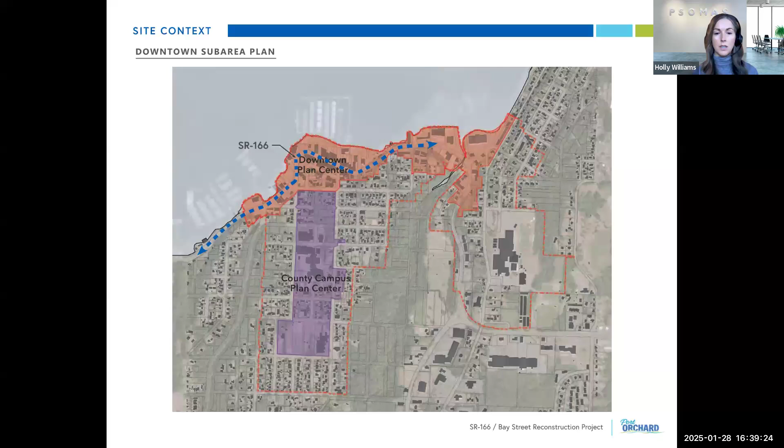The SR 166 improvements will then set the quality for future improvements and essentially create new streetscape standards for downtown.

Next slide, we're zooming in now on the west downtown planning area, looking at the redevelopment concept plan in the sub-area plan. They identified this area as a cultural, civic, and recreational hub within the community. So what we're looking at is a planning level concept for that vision, and we're carrying it through in all these various projects.

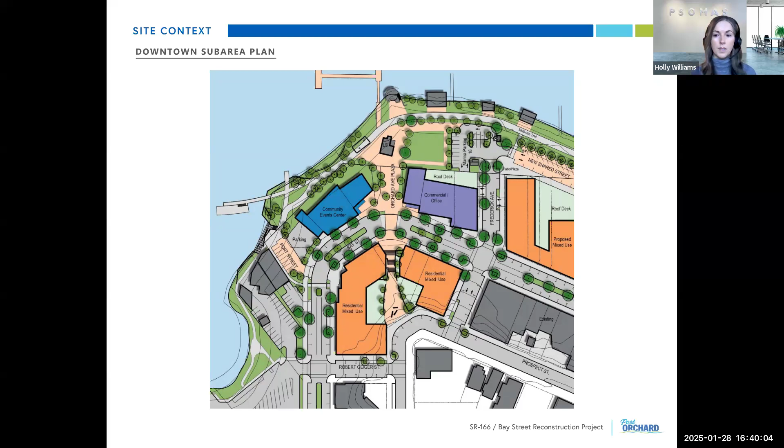Next slide. So with that, we'll look at these downtown projects quickly. One of the challenges to this project is piecing all of the different projects and puzzle pieces together. One of the biggest implementation challenges, and a driving goal for these projects, is to raise the improvements up in elevation to deal with flooding and rising sea levels.

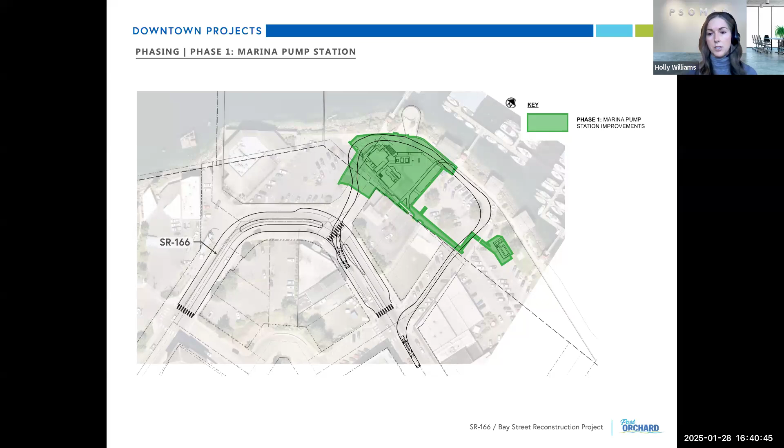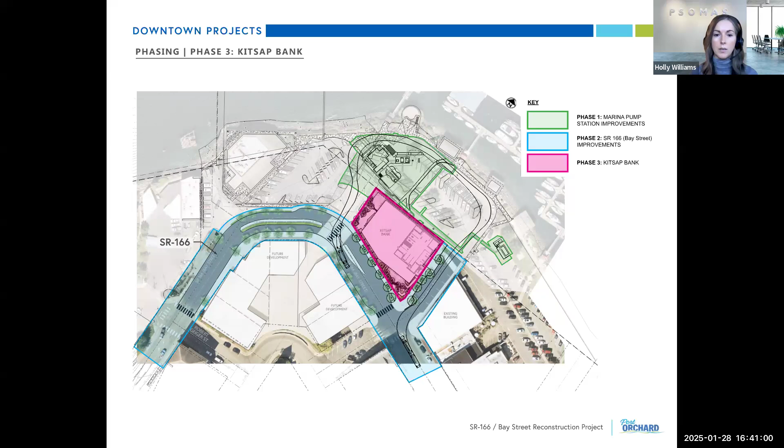So we're just going to step through quickly the phases for these different projects. This one is the lift station that's under construction now. Next would be our project that we're talking about today, the SR 166 improvements, in blue. Then next we have the relocation of the bank, in pink, the CEC and the shoreline improvements, in orange.

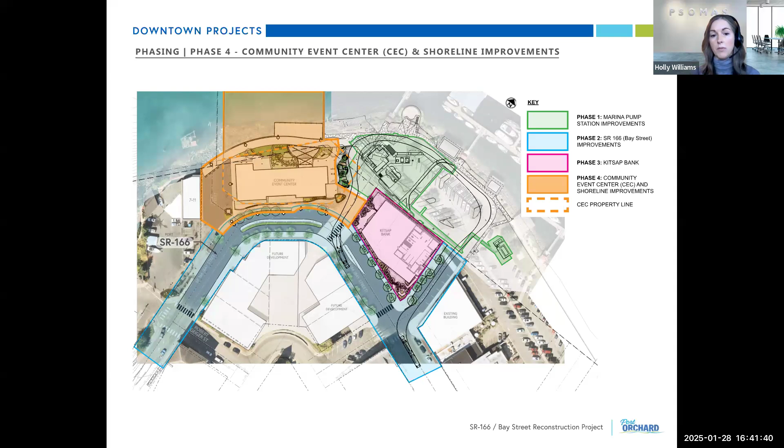So it's important to note that there's overlap within the blue areas for the extent of SR 166 with the frontage improvements on the CEC and the bank frontage improvements. We're going to show you how we're trying to tackle the interim conditions for the streetscape, back of curb for SR 166, and then planning for these future improvements with the CEC and the bank to come in for final conditions. And then the next, in yellow, will be the plaza. We're assuming that'll be the next phase to come in.

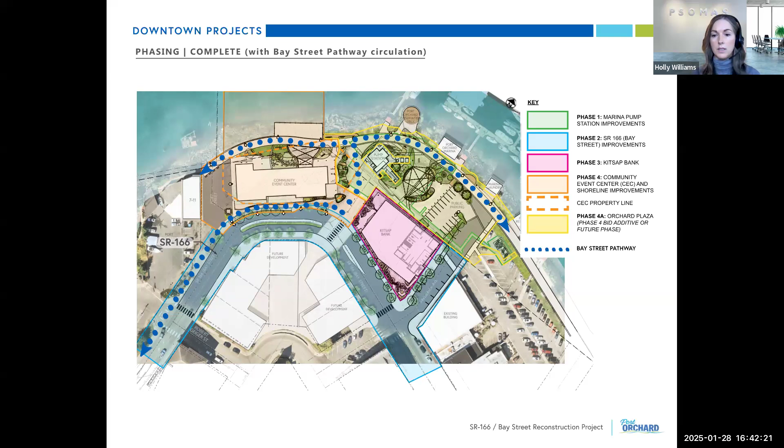And then next, the layer of the Bay Street pathway, the multi-use path. This reflects the recent study, the preferred alignment for that pathway route, which is really key to this project, as it's imperative that we implement that first segment of the pathway within these SR 166 improvements.

With that, Jake is going to step through the overall vision of the look and feel for all of these projects, and then we'll step through them briefly before getting into the design elements specifically for SR 166. Please feel free to jump in and stop us if you have any questions.

Heidi asked about the walkway, where the community center will be, or the bank is now, with the office where the marina is, asking if that walkway will pretty much stay the same, maybe with just a little more cosmetic work. On the shoreline, where Jake's pointing, it's still going to be pretty much the same, but fixed up a little more. That's part of the design improvements for the plaza, the zone in yellow that was pointed out, looking at how to integrate the new, wider promenade that the multi-use pathway will go through. But on the back side, it'll be minimal impact as much as possible to the properties outside that area. Heidi confirmed she was asking about the pathway on the waterfront, and thanked them.

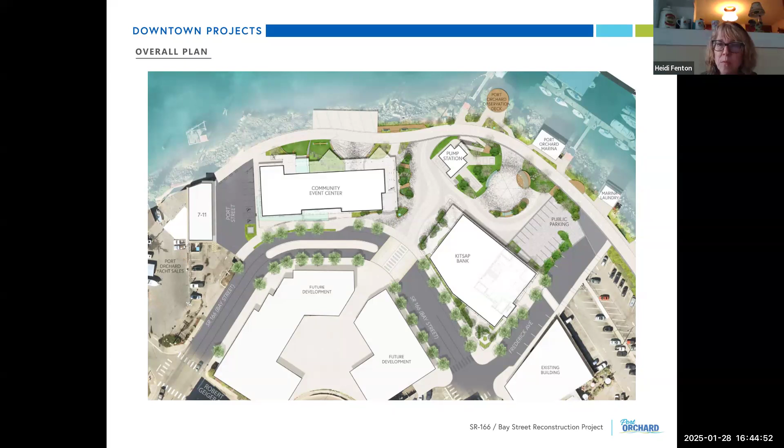Like Holly said, if you have any questions as I'm going through this, feel free to jump in.

Here we're looking at just the overall look and feel for the downtown waterfront area. Early on, a big goal for the project was to create a really inviting and active community space that can function when there's large scale events, but also on a daily basis if someone wants to come out and eat lunch or read a book from the library.

So with that, pulling from the nearby shoreline and nature that's all around, using organic forms throughout all of these different projects, and really making it a special place, each having unique spaces between the CEC, Kitsap Bank, and Orchard Plaza, but also having unifying elements that carry throughout.

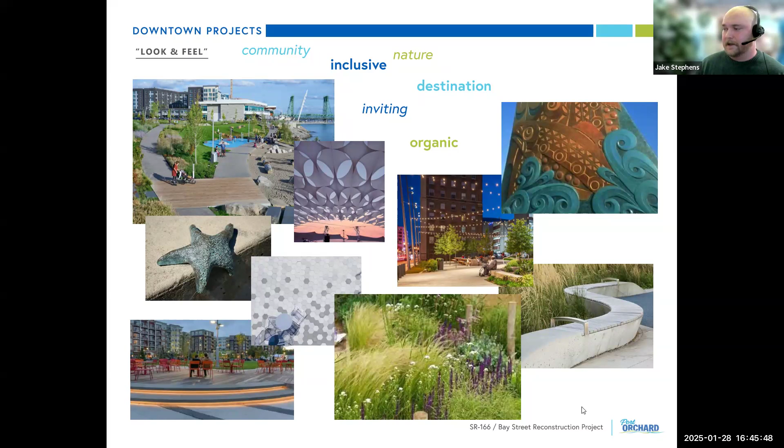So first looking here at the Community Event Center, we have the overwater deck and kind of open plaza space for larger scale events, overhead catenary lighting, and a special paving plaza treatment. And then you can see the multi-use pathway along the backside, with a different paving treatment and scoring that delineates the space, identifying it as a pedestrian promenade, like Holly was saying. We're also bringing in natural materials like wood, and a planting palette that has variety, but also low maintenance, giving that coastal vibe, look and feel.

And then also on the front side here, as Holly said, this is an earlier concept, so it's still in flux as we move forward with the CEC and SR 166 design, but showing final conditions of a scored sidewalk, street trees to create overhead canopy, which also supports a bit of traffic calming.

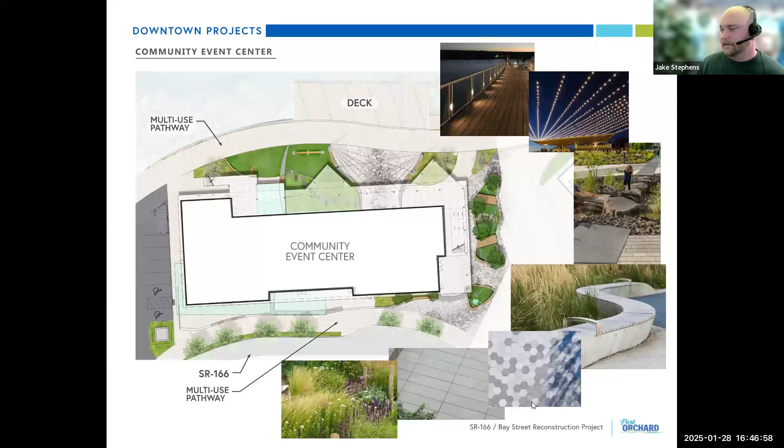Moving on to Orchard Plaza. Again, that multi-use pathway runs through like a spine of sorts along the waterfront, carrying that similar materiality and language, and it will cut through the plaza. Here using a different kind of treatment - as we work through design, we're trying to figure out ways to signal that this is still part of the pathway, but also a plaza open space, so mixed use, signaling bikers to slow down throughout here.

Also in the plaza is the lighting that will also be on SR 166. You can see that here as pedestrian scale lighting, and then other plaza lighting just to illuminate the space and create a safe, welcoming environment.

And Jake, if I can add to that - the lighting you pointed out on the top left, that's what we have planned for a version of that for the pathway when those projects, the CEC and this plaza pathway, are integrated. And you'll see that we're proposing that for the streetscape for SR 166 too, so just wanted to point out that cohesion we're trying to achieve with these elements.

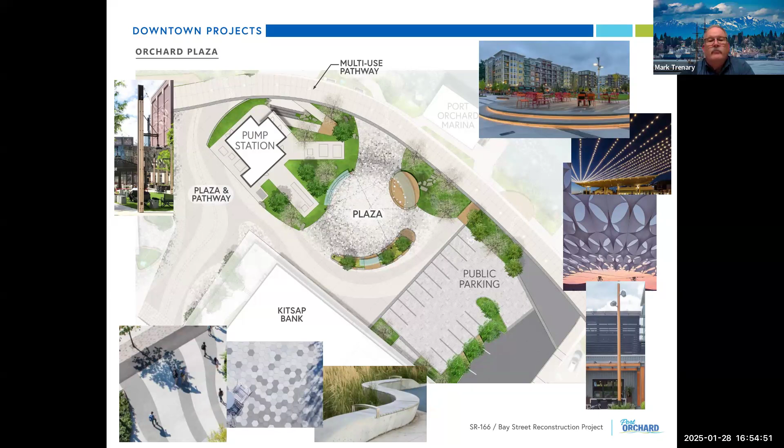Okay, thank you. Yeah, you're welcome. So we should probably scoot on to the next. Yeah, thanks, Jake. Yeah, moving along.

This image here showing final conditions of that, like we said, the early conceptual illustrative graphic, with street trees to create that canopy, roadway planters, and scoring. This is just to give a snapshot of what we had been thinking in the past.

On this next slide, I'll show you where we're at currently for the 60% submittal that John was talking about, showing the raised crossing at Orchard Plaza along with 2 center medians along the roadway, supporting traffic calming and making it more accessible and easy for pedestrians to cross the street and feel safe doing so.

On this backside, interim asphalt conditions until the CEC goes in. So with this phase, getting in essential infrastructure, illumination, matching grades where needed. Then on other portions, installing the concrete trail that was on the other portions that we had looked at for the CEC and along the waterfront, continuing that language and scoring so that it picks up again, indicating that it's a pedestrian trail space or pathway.

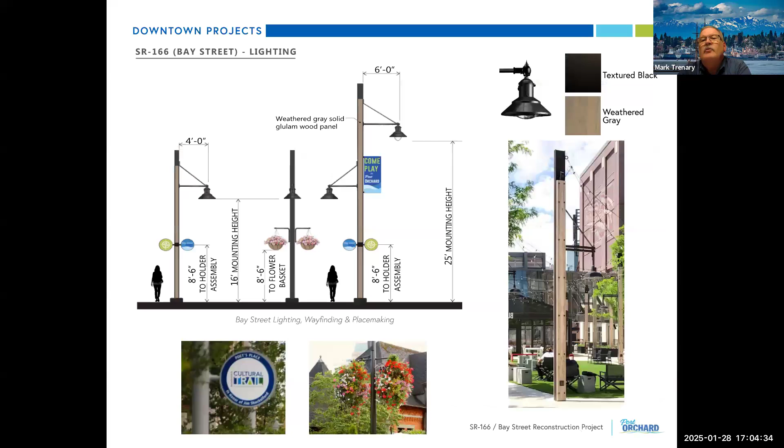Any more questions at this point? Yeah, I've got a question for John. Can you remind me or us where the 20-mile zone will begin, coming heading eastbound, coming west? Where Port Orchard Boulevard is, in relation to this new section of project, where will it drop down to the 20 zone?

We had met with WSDOT and their Olympic Region traffic engineer and came to a planning level agreement. The right place is the intersection of Kitsap and SR 166, at the turn into Water Street. The exact signage location hasn't been determined yet. We have a plan that we put together and sent to WSDOT with a detailed location for them to review - that's part of our 60% plan. We haven't sent it yet, but verbally we talked about it in our coordination meeting and agreed that was the right place to put it.

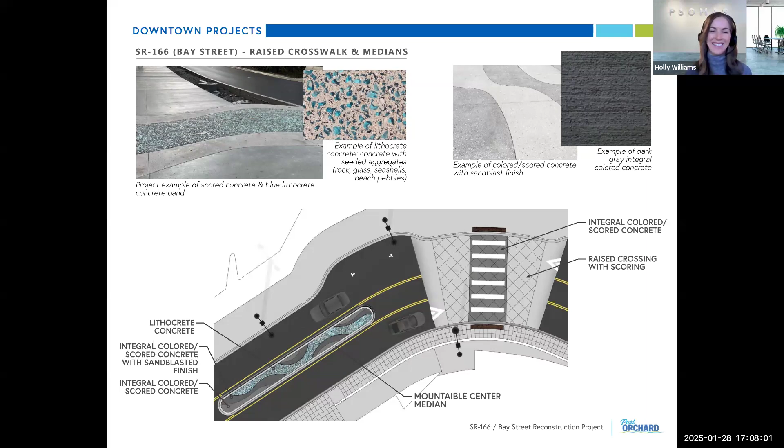I'll wrap up with a quick overview of the landscaping. We're using similar plants as proposed in the CEC planter areas and Orchard Plaza, but here along Bay Street using a more minimal, low maintenance palette that still has seasonal impact - some evergreens, but also deciduous shrubs with seasonal flowering, and some ornamental grasses.

This will be a future phase with the CEC, installing more street trees along that frontage. These are smaller street trees which will help frame the CEC without blocking too much of the architecture or views out to the waterfront.

Because the pathway goes along the CEC and SR 166, the planter space is a bit limited, so we're making sure to put in trees that can be happy within that space. The palette focuses on water-wise plants that'll do well through the summer with minimal maintenance.

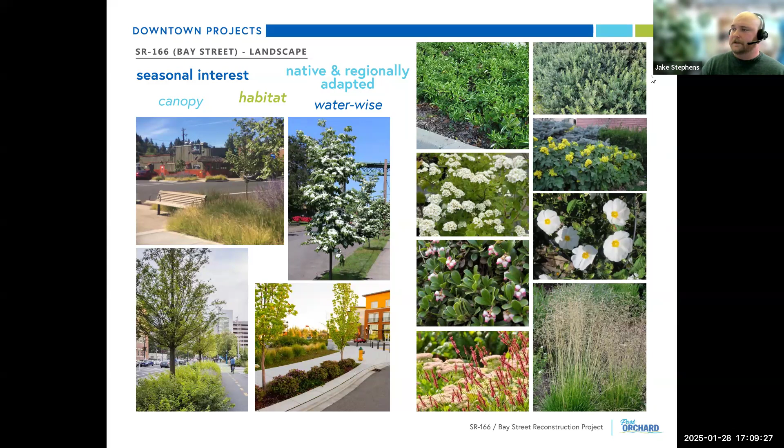Our last slide covers the parameters of this first phase of SR 166 improvements - the interim conditions and the tight space Jake mentioned with trying to fit in the multi-use trail and the frontage improvements at CEC. We don't have a lot of room for typical downtown streetscape amenities such as benches.

Gateway signage, that sort of thing. But we're thinking long term, and with opportunities within the frontages of the CEC and the plaza, we're looking to incorporate public art, seating, signage, and that sort of thing. So with this first phase of SR 166 you won't see a lot of that except for the details Jake shared, but it's good to think long term for these downtown improvements.

And with that, any additional comments or questions?

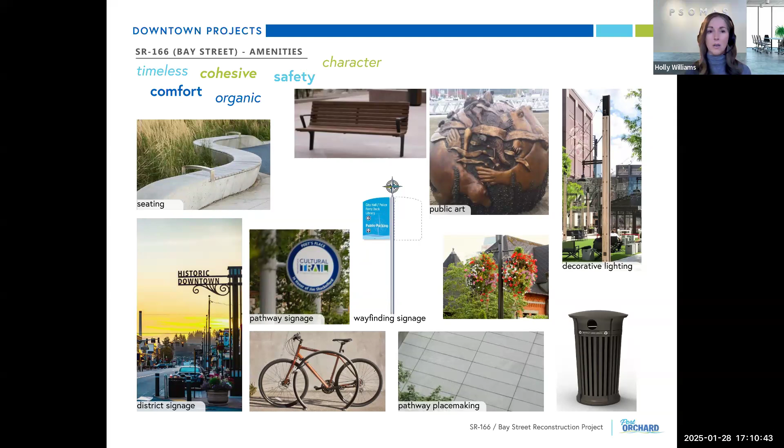Is that the only place where that blue walkway, the wave, is - or will it be implemented throughout the area? There's two medians, Jake's pointing at the bottom in the yellow. So it's a median, not a walkway - something you'll see as you drive by. And to the right of that median you have the raised crossing.

Jake, did you say that colored, wavy thing you guys are talking about is drivable? Yeah, it's drivable, it's just seeded concrete, all set in there. Is it raised like 6 inches or something, just curious?

John, do you know? I think the curb itself is a washed-out style mountable median curb, but the height differential is about 6 inches. It'll be exactly like the Bethel 166 roundabout that just went in by Kentucky Fried Chicken, so it'll be drivable like that. That's the standard.

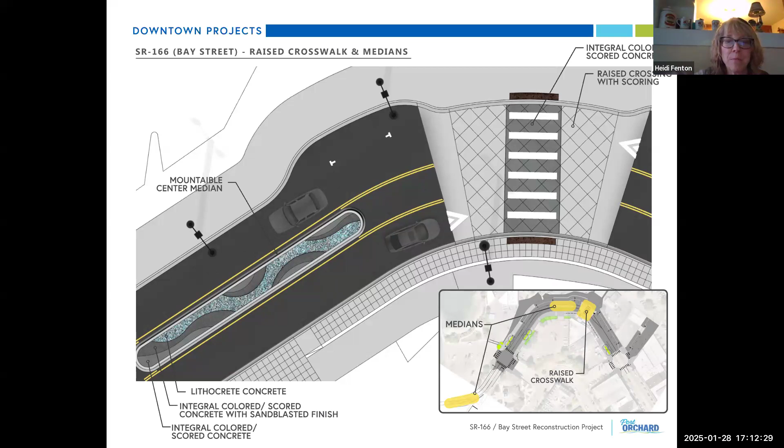This is much prettier. The color appearance is going to look a lot different though. The functionality and safety is up to state standards, but the visual stuff is going to look pretty nice and different. Maybe we could put it on the side, over by the walkway, on the side of the community center, so we could put more of that in.

Yeah, that's definitely something Holly and I will be looking at. The community event center and plaza have been put down for a bit to focus on SR 166 to get that up to speed, but I think it would be cool to have some pops of that throughout maybe the plaza or somewhere along the waterfront.

Yeah, is it very expensive? It is pricier for sure than standard, so that's why in the median we're keeping it to a limited area, but we've used it in the past as a little band or sort of medallion. So there's ways to use it strategically that creates a nice impact. Yeah, beautify the downtown.

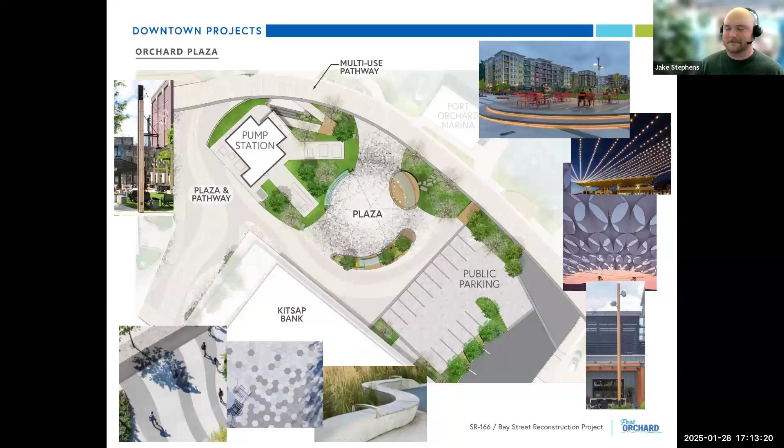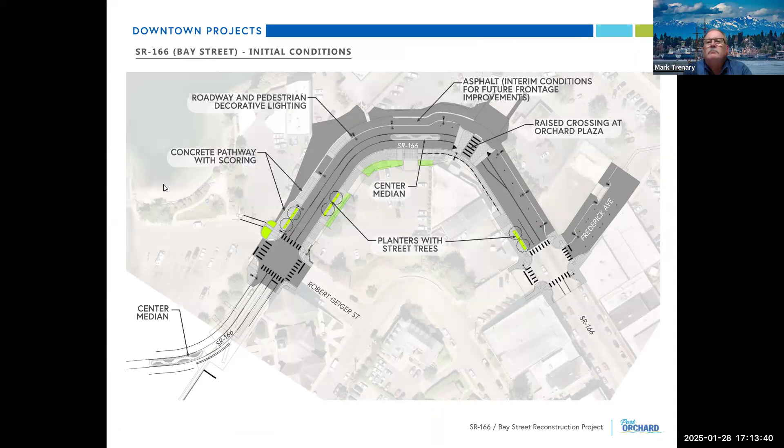So we're trying to get to 60%, or are we at 60% now? We're at 60%. The design team's finished the plans, estimates, and spec development. We'll be sending that to the city tomorrow or tonight. When I package it together, Chris is out of the office today, but effectively we're there. We're at the 60% milestone.

The next steps for the project really is we're going to go talk to WSDOT, get approval to start getting some right-of-way acquisition. We'll start talking to some property owners and get some right of entry and construction easements, hopefully, for the projects. We have to do some grading and access changes and utility stubs to some of the private property owners going through the corridor. So this is kind of generally the next step.

We haven't gotten into the details exactly when that outreach is going to happen, but I guess I'm just talking about the big important milestones to happen after 60, usually the next big thing.

For us as a city, the city council, just discussing next steps, I'll leave it up to this committee. If you want this to go to a study session, I will tell you today, I've been having conversations with our legal team. This is a federally funded project. There is grant funding available. Transportation dollars is not excluded on the hold right now with federal dollars. So we could push this out a little bit before we proceed and take it back to council. But I don't believe there's been any significant changes in the project since council last saw this. So I'll just query you right now to see what your desire is.

And landscape can always change at 90%, correct, team? Yes. So everything we've talked about today about landscaping modifications, treatment to pavement, putting in an RFP is something we could add in. The RFP has a little bit of review process at WSDOT, but effectively the things we don't want to do after 60 would be changing parking layouts, changing the curb lines, changing the length of the project. That's something we would recommend probably not doing.

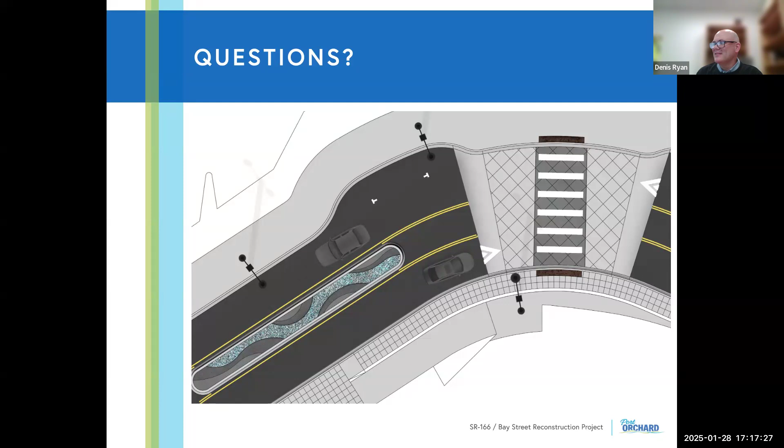All right, so moving along to future agenda items. We discussed at a previous city council meeting about bicyclist signage. I think Councilmember Rosapepe mentioned it, some instances. Chris wanted to be part of a conversation about that because he's got great experience. He lives on Bainbridge Island, helped design a lot of the paths, the bicycle ride share areas. So just wanted to provide some overviews of what's available out there, if that's something this committee would like to undertake in the future.

He does want to give an update on the TIF study in February. We're going to talk about 2025 grant applications in February too, but we'll wait and see what happens with the federal grants. There was some action today where the stop payments were postponed a week, so we'll see what comes with that. We may need to get Charlie involved for a legal opinion if that's a prolonged effort.

And then we're going to be talking about the 2025 road preservation program. Most of our money is going to Sidney non-motorized. We do have that area of Sidney where we've gotten some public input. Council provided an extra $100,000 in our budget, so we're going to be doing some pavement repairs with that $100,000 in front of the Paul Powers Park area. That's what we're targeting. I'm happy to answer any other questions if you have anything else.

No, this is just kind of—I like all those future topics. I didn't get the agenda that we normally get, since Chris Hammer was out, so I don't know how you got yours, council member Mark. But I happened to be checking some McCormick stuff, and then my agenda popped up, and I thought, oh, for tonight—that was kind of nice. Usually we get the agenda a couple days before our transportation meeting, or early that day. It went out yesterday, I can check to see.